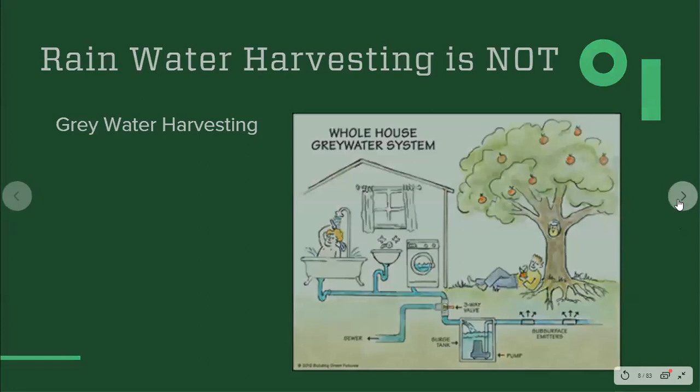So I am not a lawyer at all. I am a horticulture person. So I'm not going to really interpret these laws for you. I have screenshots from the actual law, so you can see the actual language of the law. You can interpret it how you think it means. Any big questions on the law itself, I probably won't be able to really answer for you, but I just want to let you know what the law actually states. So let's go over some of this.

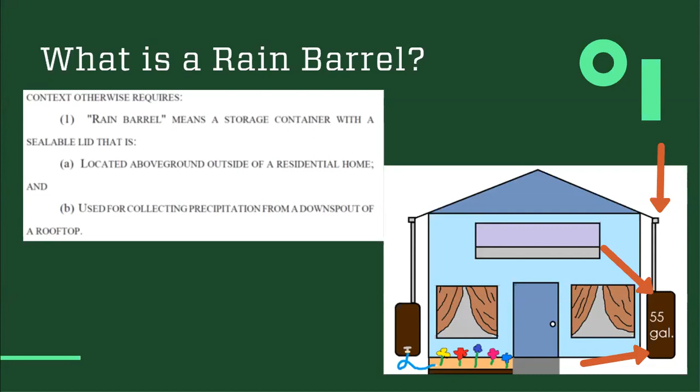So in the law, a rain barrel is defined as a storage container with a sealable lid that is above ground, so they're not supposed to be buried, and outside of a residential home, and we're using it to collect precipitation from a downspout of a rooftop. So pretty specific, but there's also some room for interpretation there as well. The container could be a lot of different types of containers, and then we get into the wormhole of what is a residential home, and we'll talk about that a little bit further here.

So how much water can you collect? You can collect no more than 2 rain barrels with a combined storage capacity of 110 gallons or less. So you can't have 3 rain barrels even if the capacity is still at that 110 gallons. You can only have the 2 vessels, and your maximum amount is 110 gallons. So basically, to get the most rainwater that you legally can, 2 55-gallon barrels is the optimal situation that you're looking for.

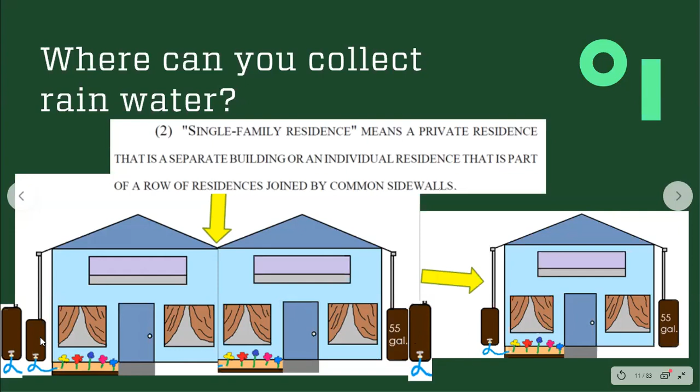So the law does go on to define a single family residence as a private residence that is a separate building. So that's the easy situation, a standalone single family home, or an individual residence that is part of a row of residences joined by common sidewalls. So here's our single family home, easy. And then here, these two residences, they do share a common sidewall. They are separate residences and they would both be able to have their two 55-gallon barrels.

Now, just a little note about HOAs, homeowners associations. The law does specifically state that the homeowners association cannot prohibit you from using rain barrels to collect precipitation. However, they can potentially give you guidelines as far as what the rain barrels need to look like, where you can put them on your property, and things like that. But they can't just tell you no.

So how can we use that collected rainwater legally? Again, this one gets a little bit fuzzy. The collected precipitation must be used for outdoor purposes, including irrigation of lawns and gardens, which is really the main reason that I think people would want to have a rain barrel.

Now, a lot of people ask, can I water my pets with them? Or can I bring my houseplants outside and then I'm using it outdoors? I don't know. There's a lot of ifs in here, and maybe we'll get into who regulates the law, and they would probably be a better person to ask, but it's just not 100% clear about what that means. But irrigating outdoor lawns and gardens, 100%, totally fine to do.

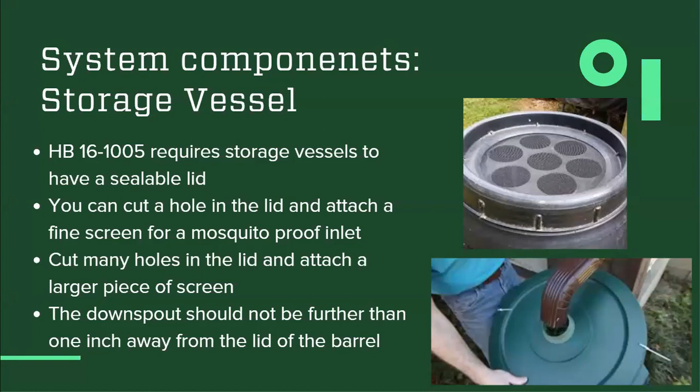And then the downspout should not be further than 1 inch away from the lid of the barrel. So we don't want, you know, like a couple feet in between our downspout and our barrel. There's going to be a lot of waste that way. It's best to get it within 1 inch of the inlet into the barrel. You also, instead of having your inlet go in the top of the barrel, like it shows in this photo, you can have the inlet go in the side of the barrel, near the top. That would be totally fine too.

Excuse me 1 second. My dogs are barking. Hey. The mailman. Sorry about that. Okay. Another joy of working from home.

So you want to have that. If you're looking for a prefabricated barrel, make sure there's an overflow. There's a lot of prefabricated barrels that are not well planned out, let's say. So look for that. You need an inlet for the downspout, obviously. There's got to be a way for the water to get from your roof into the barrel.

And then you want to have at least 1, possibly 2 hose spigots. Ideally, the spigots are going to be 8 to 9 inches from the bottom of the barrel so that you avoid sediment. I mean, it's kind of natural. Sediment's going to get in the barrel. You want to have some room for that to settle, so that when you open the spigot, you're not just draining out a bunch of sand and dirt. So 8 to 9 inches from the bottom should be just fine.

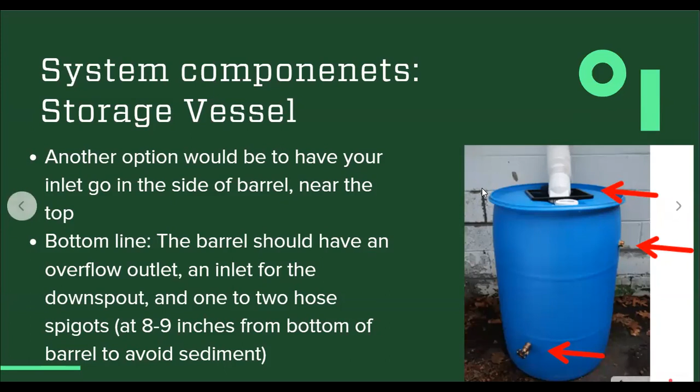So that's kind of the storage vessel. And then how do we get the water from the rain barrel into our landscapes? This is a gravity-fed system. I'm sure that there are those of you on the call who have the skills to be able to create some kind of pump and something really fancy to get the water from the barrel to the landscape. For myself and probably some more of you, this is going to be a gravity-fed system, easy and simple.

Now, I've seen people hook up a drip system to their barrel, but it's not the easiest thing to do. For one, your barrel's probably going to have to be at least 4 feet above the emitters. So you're going to have to raise that barrel up a pretty good amount. And even then, your flow is going to be kind of poor. And if you've ever used a drip system, you know that you need a little bit of pressure to get that water pushed through those emitters. So it can be done. Definitely not the easiest thing to do.

The easiest thing is to just hook a hose up to that spigot, open up the rain barrel, set the hose near the base of the plants that you want to be watered, and kind of move it around every few minutes. That's the easiest way. You can also fill watering cans either with the hose or just straight from the spigot. Those are totally fine ways of using the water from your rain barrel, super easy. The pressure is going to be best, obviously, when the barrel is full and when it's elevated. We do suggest that you elevate the barrel, and we'll get into that a little bit more.

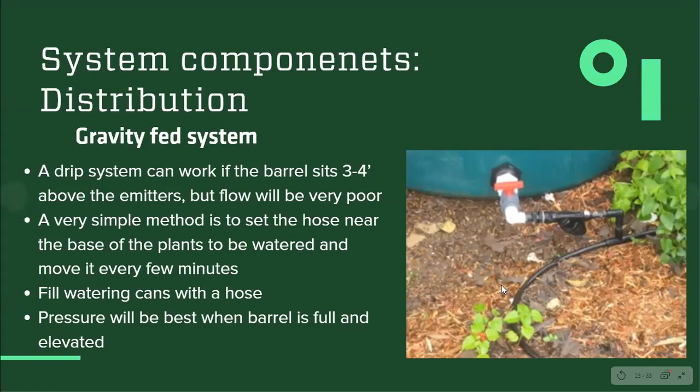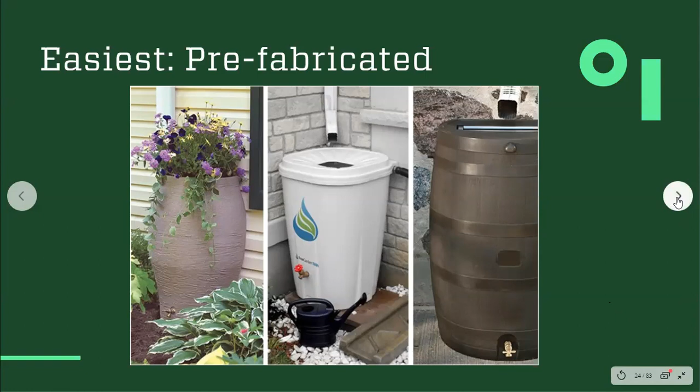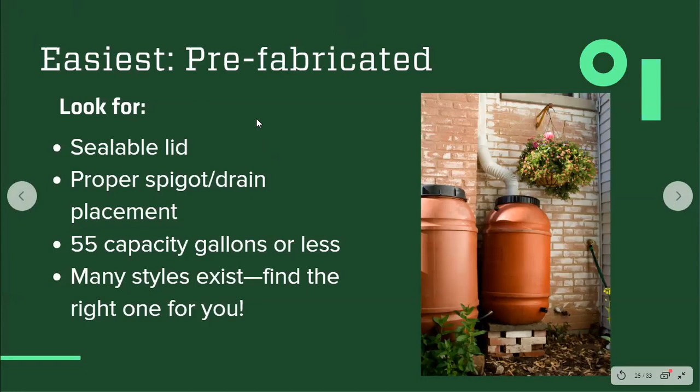So check that out. Ideally, you want it to be a 55-gallon barrel so that you can buy 2 of them and collect your 110 gallons. And there's many styles that exist. So find the style that's right for you.

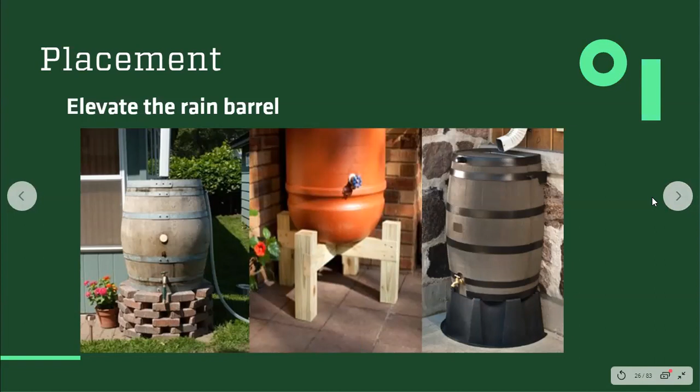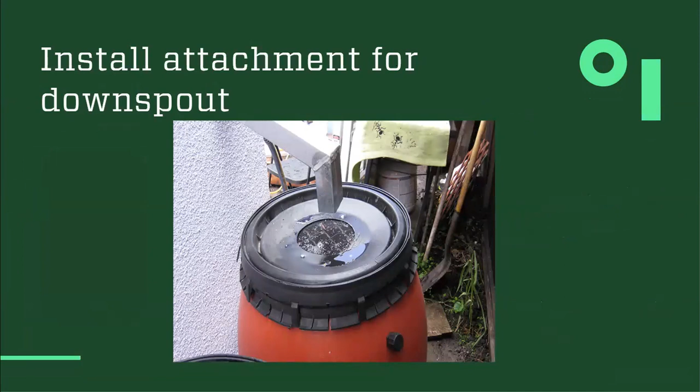Now, we next need to consider how we're going to attach the barrel to the downspout. How are we going to get the water from the downspout into the barrel? So one thing to consider is downspout filtration. I have lots of trees in my neighborhood. We have to clean our gutters out a few times a year. We don't want all of those leaves clogging up our downspout and our devices that are getting water into the barrel. So there's a few different things you can do.

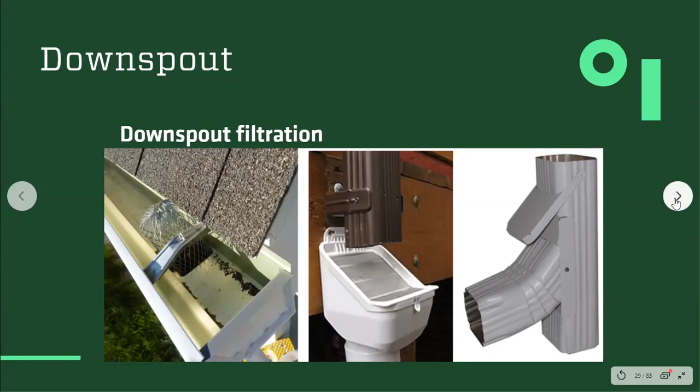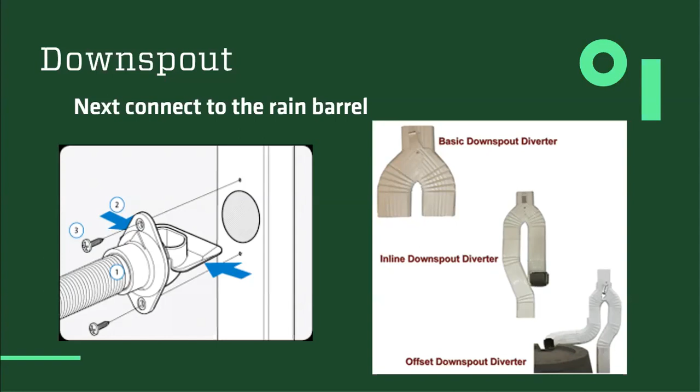All these different kinds of diverters do similar things. It just depends on your site, the design that you have in mind, how you want this to look on your downspout. If you want to drill a hole in your downspout, if you want to cut your downspout, these are all things to consider. And there's just a lot of ways. You can just cut your downspout and have it pouring straight into your rain barrel. But you have to have a good plan for overflow in that case. So lots and lots of ways to do it. These are just a few of the options.

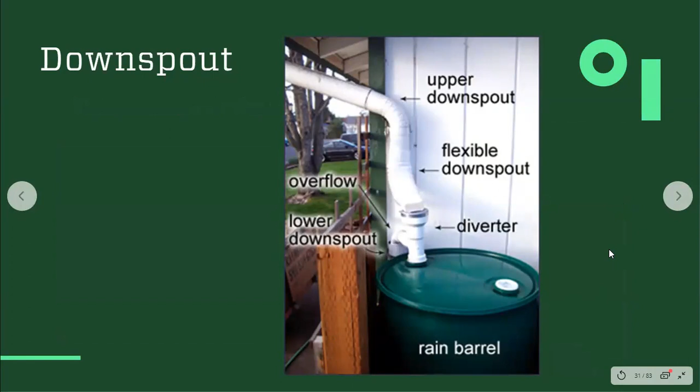And here's another photo of somebody else's setup. So they have their upper downspout here coming from their roof, connected to a flexible downspout that is going into a diverter that will divert the water into the barrel until it fills, and then the water will enter the lower downspout and drain just like it would normally if there were not a rain barrel there.

So the next step is to integrate that barrel into your landscape. You want to figure out, how am I going to use this water? It's no good to harvest it and store it and then not use it. So definitely have a plan for how you're going to integrate that barrel into your landscape and use it beneficially. So one of the first questions to ask yourself, where do you want to use the water? Consider the water demands of different plants. If you have some very xeric plants, maybe you're not going to be using your rainwater on them because they don't need a lot of irrigation. You might want to use it on some of your higher water demand plants.

Aesthetics, maybe your HOA says it can't be in the front, it has to be in the back, or maybe you just don't want it in the front. So think about how it's going to look. Ease of use. You don't want it somewhere where you have to crawl over a bunch of rocks or things like that to get to it. Make it easy to use because you're more likely to use it if it's easy to use.

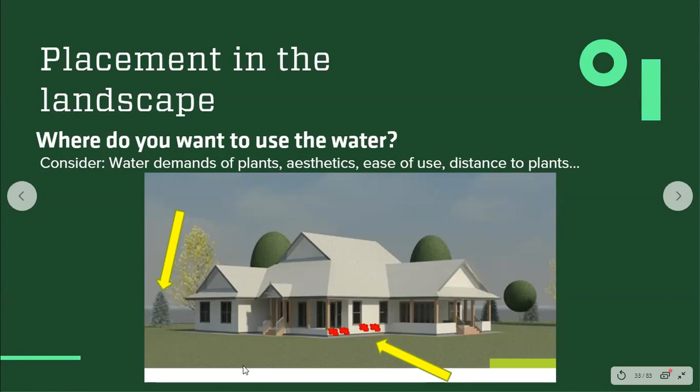And then probably the biggest one, think of the distance to the plants you want to water. So if you want to water this tree over here that this yellow arrow is pointing to, you probably don't want to put your rain barrel way on the other side of the house. Same if you want to water these flowers, you don't want to put the rain barrel really far away from it. So definitely consider the distance to the plants that you hope to water.

And then, do you have access to a downspout? I mean, this is going to be your limiting factor, right? If you really, really want your barrel over here in this corner, but there's no downspout, you could potentially extend your downspout over there, or adding a downspout would definitely be possible, but think about where your downspouts already are. And can you make those spots work for you? That would be easiest.

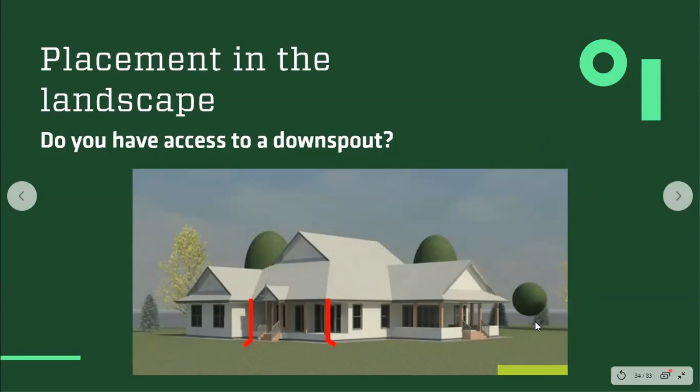And then think about your roof geometry. This is something I did not ever consider until I installed the rain barrel. So take a look at how much of your roof is draining into that specific downspout. Maybe you want to install your barrel where you're getting the most runoff from a roof, or maybe you have way too much runoff from a certain area, so you need to move it to a downspout that gets a little bit less runoff. So take a really good close look at your roof geometry, where your downspouts are located, and how and where they're draining.

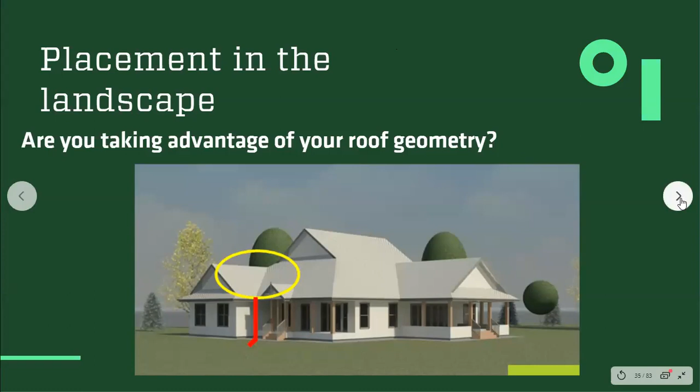So this is a neat thing to figure out. This is an equation that will allow you to figure out, using the amount of rain that fell in inches, how many gallons of water you're going to get into your barrel. Sorry for the folks not in America that we're using American units here. I'm sure another equation exists, and you can find anything on the internet.

So let's look at an example of that. Let's just say that the square footage of our roof that we're looking at here is 500 square feet, just for the sake of this example. And here's our runoff coefficient, is what we'll call it, 0.63. Now you can see we have a few different amounts of inches of rainfall, and then how many gallons that gives you in your barrel.

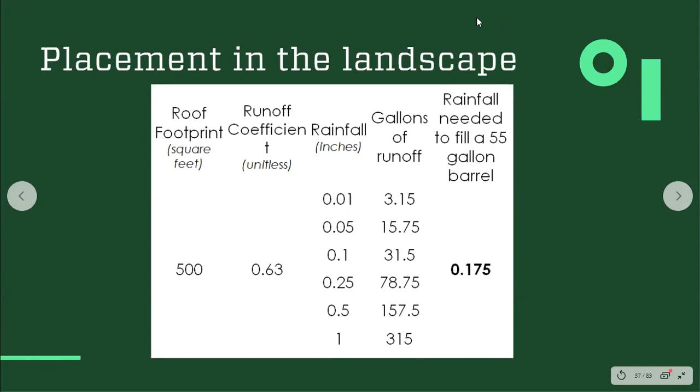If it rains 1 inch, that's 315 gallons. That's way more than we could ever even collect. So they fill fast, faster than you would think if you haven't had a rain barrel. So that is definitely something interesting to take a look at. So how much money and how much water is this going to save you? Let's take a look at that.

So this answer, you know, it depends. It depends on a lot of things. It depends on the hydrology of your roof, like how much is running off from your downspout into your barrel. On your landscaping features, do you have some landscaping features that are making better use of what you are collecting? The water use of the plants is obviously huge, the size of your lot, and then the local water costs.

So we're going to look at April to October, because as you can see, that's kind of our biggest rainfall months that we have. So before we go into our example, let's make some assumptions here. Let's assume that we can capture and use 40% of the monthly precipitation. Some is going to get lost during large thunderstorm events, whether that's overflow out of your gutters or overflow out of the barrel. There's a lot of things that could happen. So let's assume we capture a little less than half, 40% of the monthly precipitation.

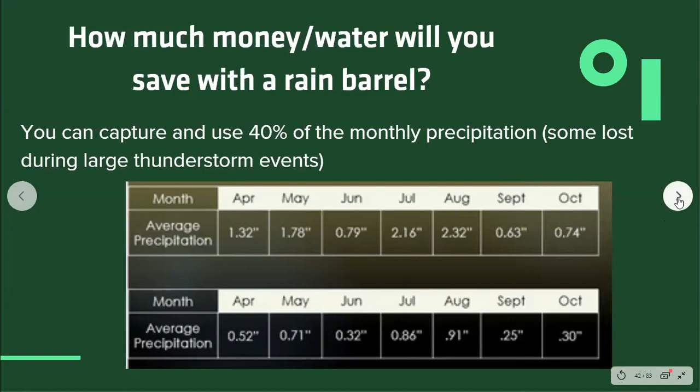All this is showing is we took the average precipitation and we took 40% of it. So here's the inches of rainfall that we are assuming that we are collecting in our barrel April through October. And then we plugged those inches into our equation using the 750 square foot collection area of our roof. And these are the amounts of gallons that we capture for each of these months using that 40%.

It's not about money is basically what I'll say here. It is saving you a little bit of money, and it is absolutely saving a little bit of water. But the reason to have a rain barrel in your yard isn't to save money. If that's why you're here, I'm sorry to disappoint you. But it's not about that really.

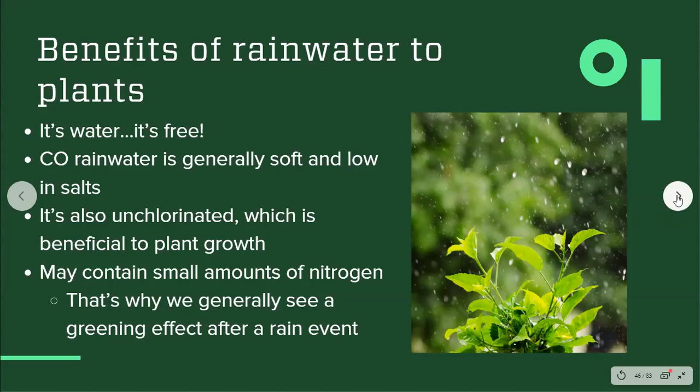So let's talk about safety. Like I said, there's a lot of safety stuff to consider when we're thinking about installing a rain barrel. And so one of the first things to consider is storing, mainly how long you're storing it and how you're storing it. So ideally, you want to use that collected rainwater right away, within a week if possible. That would be the ideal thing to do.

The research has shown that you can store the rainwater for up to a month, but if you hold it longer than a month, you should drain it for a lot of reasons that we'll get into, contaminants and things like that. And also, rain barrels are only relevant if you use them. There's no point to capture this water and store this water and just hoard it. There's no point in that.

So let me give you a little example that shows you how harmful it could be to store the water and not use it. Let's say we have a subdivision, like an HOA kind of thing, and there's 1,000 homes. And every one of those 1,000 homes installs one rain barrel. And let's say 20% of those homeowners don't use their rain barrels. They don't use the water in them. They just let it sit there.

That's 11,000 gallons not entering back into the water cycle. That's a problem, and that defeats the purpose. So use that water that you collected. That's why you collected it.

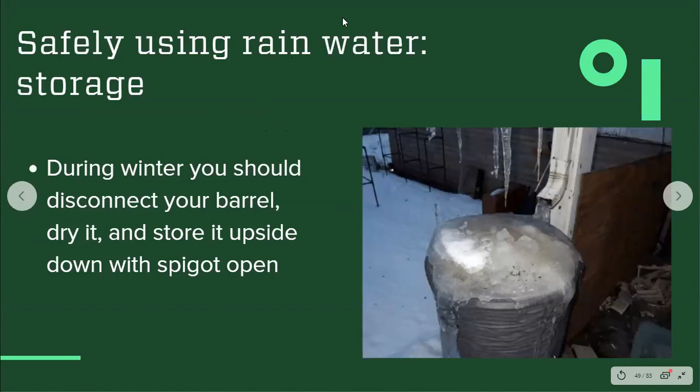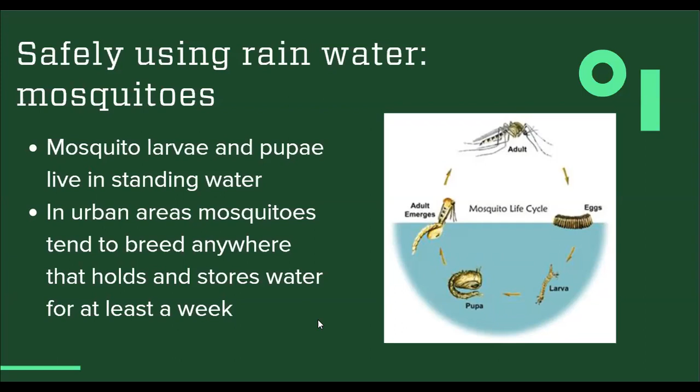So in urban areas, it's been found that mosquitoes will breed anywhere that holds and stores water for at least a week. That's why we're saying ideally use that water within a week so that we don't have the mosquito problem. This is why the House bill requires the rain barrels to have a sealable lid so that the mosquitoes can't get in and breed, and we don't have more of a mosquito issue now that we allow rain barrels.

You've got to cover the inlet from the downspout into the barrel with a fine screen that mosquitoes won't be able to enter, and then at least once per month, empty that barrel completely out. That way, if a mosquito did find her way in and lay her eggs, you're going to get rid of it. And if you plan to be away from home for an extended period of time, just go ahead and disconnect that rain barrel from the downspout. That way, something doesn't happen while you're gone.

So you're going to have an overflow hose like we've talked about. You want it to be at least 8 feet long. This should prevent mosquitoes who are searching for water to breed in from finding your barrel. You also can attach a piece of fine screen to your overflow hose on either end to prevent mosquitoes from getting in.

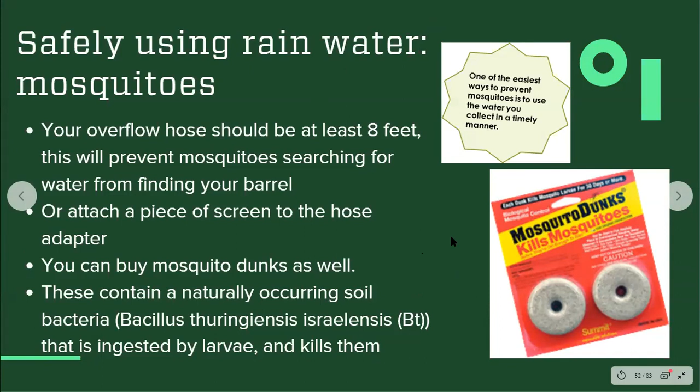There's also mosquito dunks that you can buy. They contain a naturally occurring soil bacteria that's ingested by the larva of the mosquito, and then it kills them. So if you want to be super extra careful, you can get that. If you're going to be irrigating edible gardens or something like that, I would definitely read the label and make sure that that's going to be okay for the product that you get.

Now, water quality. This can also be a bit of a safety concern. Now, relatively speaking, rainwater in Colorado is of pretty good quality. We don't have a lot of issues with our actual rainwater being contaminated, thank goodness. But one of the biggest problems, especially down here in southern Colorado, is that it doesn't rain a lot.

So in between rain events, there's a lot of time for things to build up on the roof, like bird droppings, dust, and other contaminants. And then the water runs from the roof into the downspout and it brings all those contaminants with it. So that's the bigger problem than that the rainwater itself isn't clean. It's that our roofs are typically kind of dirty.

So there's also been tests that have shown that, depending on what your roof is made out of, there could be heavy metals that are getting from your rooftop into the water. So that's something to consider. To be honest, I wouldn't irrigate edible plants with your rainwater. It's just not worth the risk. Use it on your trees and your ornamental shrubs and flowers. It's just a safer bet.

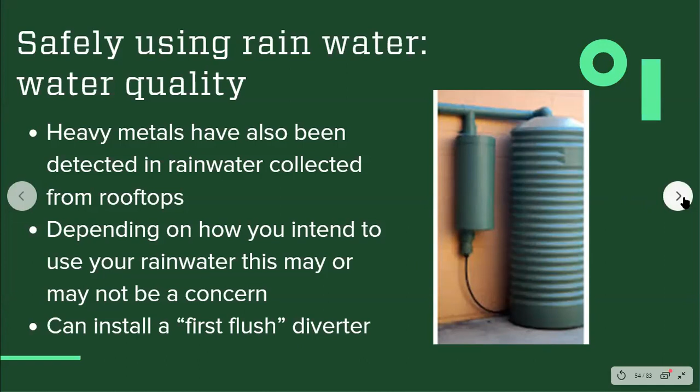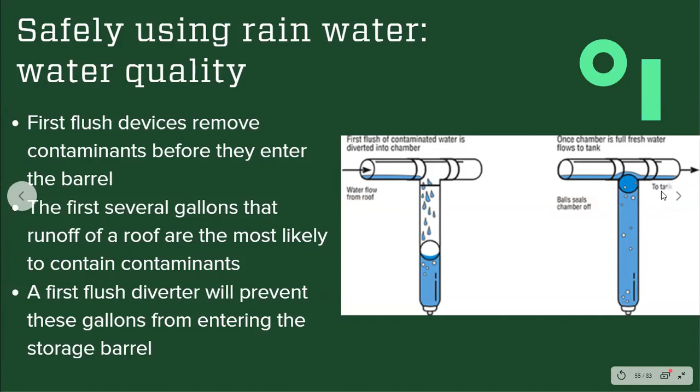Another safety concern could be algae, and this is a big concern, especially if you have a white barrel. A lot of the barrels that you would get for free from different food places are white. So this is definitely something to consider. If you do get an algae breakout in your barrel, you can wash it out with a very, very dilute bleach solution. We're talking like 2%. And then you're going to have to rinse your barrel very, very well after washing.

And then beware of where you're draining that dilute bleach solution. You don't want to drain that onto your lawn or your plants or anywhere where your pets or children might get into it. So do be aware of that. And like I said, just be really cautious of watering edible plants with water from a barrel that has had an algae problem. There are some algae that produce toxins that can be harmful to humans. So again, I don't water edible plants with my rain barrel. It's just a safer bet not to.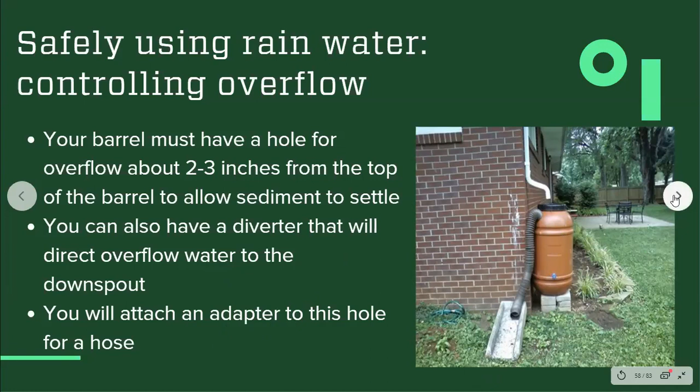So you can use the overflow hose from barrel 1 and connect that to a hole in barrel 2, and then have another hole in barrel 2 that would be for even more overflow. Now, if you wanted to do something like this, barrel 1 does need to be slightly higher than barrel 2 because gravity. So do consider that.

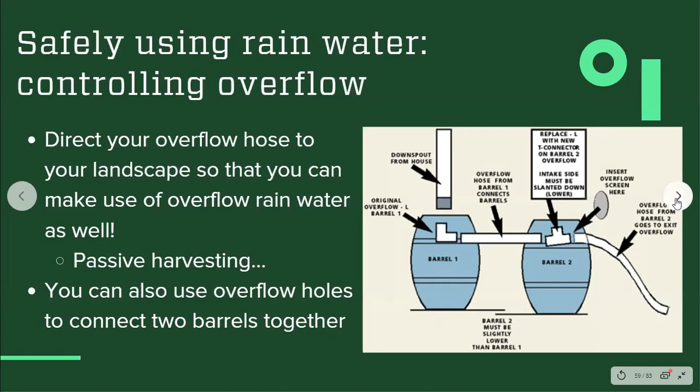So when it comes time to install the barrel, select a downspout. Hopefully you've already been out in your yard and you know which section of your roof it is that you want. You may need to cut the downspout or drill a hole in it. That's pretty likely. You're going to have to do one of those 2 things.

I would definitely use some silicone sealant if you're making your own barrel to seal any spigots or overflow holes. We've done it with and we've done it without, and you want it with, definitely. There's definitely a lot of leakage if you don't use the sealant. So yeah, that's just kind of a list of things that you might need. You might not need some of it, but just some things to consider.

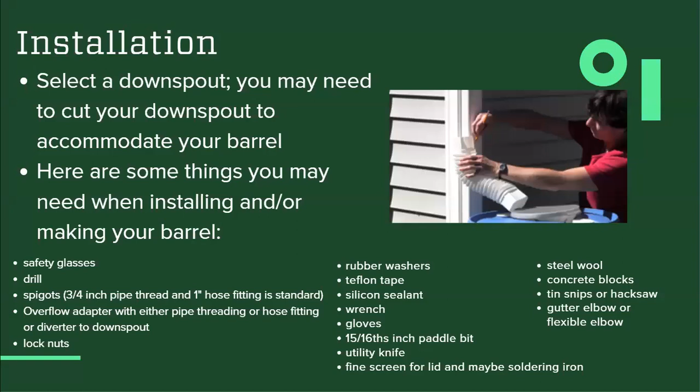So let's look at an example of a little DIY barrel. Actually, I'll take just a quick break and check the chat here and get some questions answered.

So what's a good way to measure or calculate your roof square footage? So once you figure out which sections of your roof are draining to the downspout that you want to use, it's just some geometry, a little math. You probably have to either get up there and measure or just estimate if you're good at that kind of thing. I'm sure not. But get up there and measure and break it into some squares and use the equation for area to find the area and add up all those different sections to get your rough square footage.

Okay, it looks like somebody also suggested using Google Maps. There's a measurement feature. Did not know that. So thank you, Dom. That is very, very interesting. I will have to look into that.

What other questions? I'll take a quick break and give you guys a couple minutes to enter any other questions that you have so far about using a rain barrel into the chat.

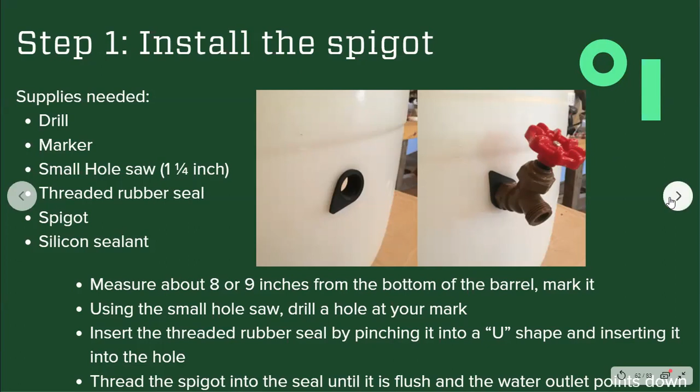So I marked where I wanted my fill hose to be near the top. Consider your site. You don't want to just do this blindly. You want to consider what side of your downspout you want it on. Consider how high it's going to be once you have it elevated. So it's probably best to do this on site where you're actually going to be using it.

And then we attached this little thing that came in the kit called a dam diverter. For that, we just popped the diverter on the end of this corrugated fill hose, and that was that. We also, I guess I could have taken this out for this class, but we had do not drink stickers just to make sure. You never know.

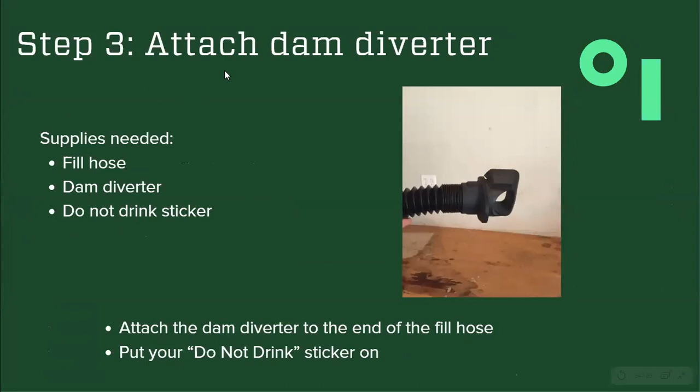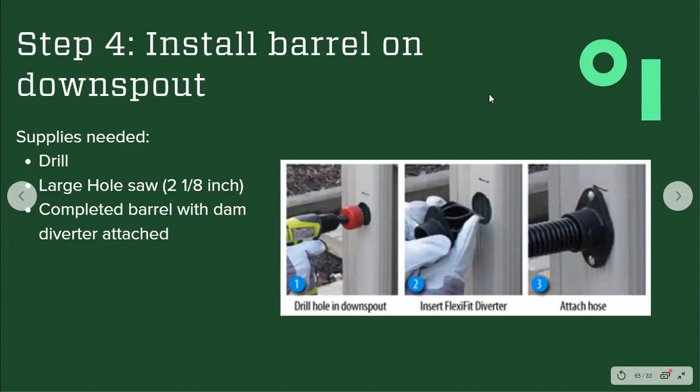So then we get to installing the barrel onto the downspout. So here's a kind of up close picture of how that went. And this is from the kit that I used. So I had another hole saw, a 2 1/8 inch hole saw, and I had my barrel complete with the hose and the dam diverter. I'm gonna go to the other slide where I have the directions, but that's the picture. It'll be on the other slide in a smaller form.

But you want to mark the downspout where you want to install the hose. It's got to be higher than the level of the fill hose because, again, gravity. And then you want to take into account your elevated base. So you definitely want to do this on site with your barrel right there. So using that hole saw, drill a hole at your mark. If you have a downspout with a narrow side, it's best to do it on that end.

Insert the dam diverter with the cup facing up. If you have a diverter like this, you want the cup facing up, and then use self-tapping screws to attach that diverter onto the downspout. Attach the fill hose. If you need to cut your fill hose, if you ever use a corrugated hose like this, you want to do it at a non-corrugated spot, ideally.

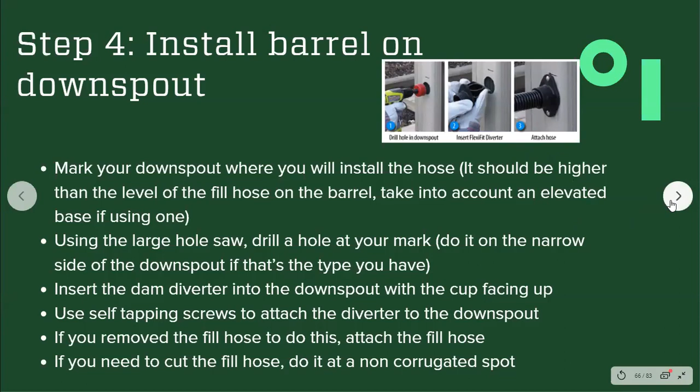So step 5 is kind of optional. You can install a drain at the very bottom if you want to have a way to completely drain it out. You do have the spigot, so not totally necessary, but it is nice to have the drain. So for this, you need a drill, hole saw of the correct diameter. That's going to depend on the size of the drain, so you want to match that up. A threaded drain, we got a brass drain for this. A drain cap so that you can seal it up, an O-ring, and a nut for the inside, and then of course that silicone sealant.

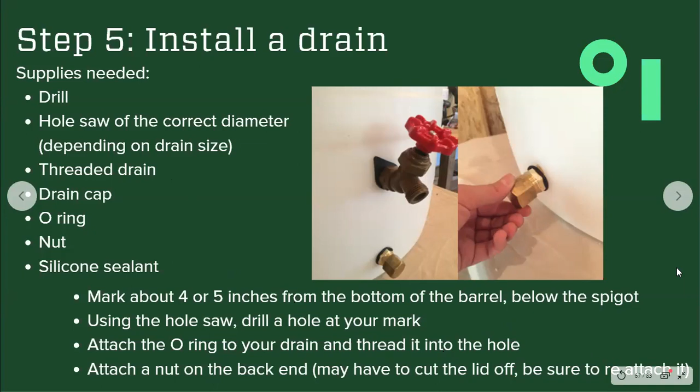So this was about 4 inches from the bottom of the barrel below the spigot. I used the hole saw, drilled the hole, attached the O-ring, using my sealant of course, and then attached the nut on the back end. So unless you have super skinny long arms, you might have to cut the lid off to get the nut on the back of the drain. And that's okay, cut the lid off however you're able to, and then just be sure to reattach it, because obviously the house bill does require a sealable lid.

This step is also kind of optional, to paint it. So we talked about the algae. If you have a barrel that's painted and lets less light in, that's better for preventing algae growth. So you can paint it. If you're not artistic, you can also buy barrel wraps online. That's just something you can slip over your barrel. Alternatively, clean it often and try to place it in the shade if you don't want to do either of those two things. They are optional, but it makes it look kind of cool, and it does help with the algae.

All right, cool. We're going to move into passive rainwater harvesting, which is not using rain barrels. So what final questions do we have about rain barrels? I'll give you guys a couple minutes to get those in the chat. All right, I'm not seeing anything coming in yet, but if something comes up, type it in there. I will see it eventually and get you answered.

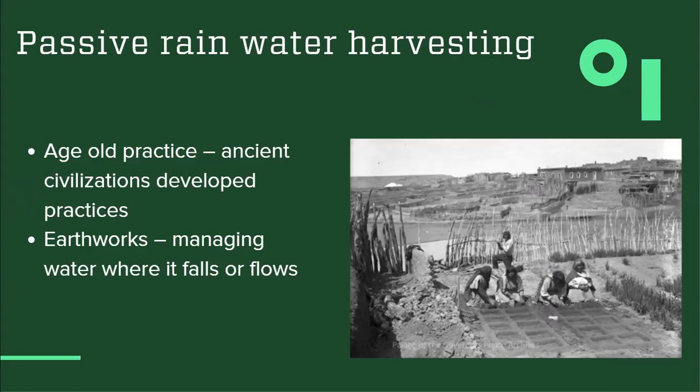So passive rainwater harvesting, a little definition, is diverting water over land to vegetated areas for immediate use. So we're looking at the 3 S's here. We want to slow it down, spread it out, and sink it down. Those are the goals of passive rainwater harvesting. And then you integrate that into your landscape. So these are kind of the main elements of passive rainwater harvesting, the main things to consider.

So gutters and downspouts, that's the easiest thing. You know, you get a downspout extension and you divert it over to your flower bed, or you kind of just are guiding those downspouts so the water goes where you want it to and where it can be used by plants. And then swales, berms, French drains, and bio-infiltration gardens, also known as rain gardens. So we'll talk about each one of those in a little bit more detail.

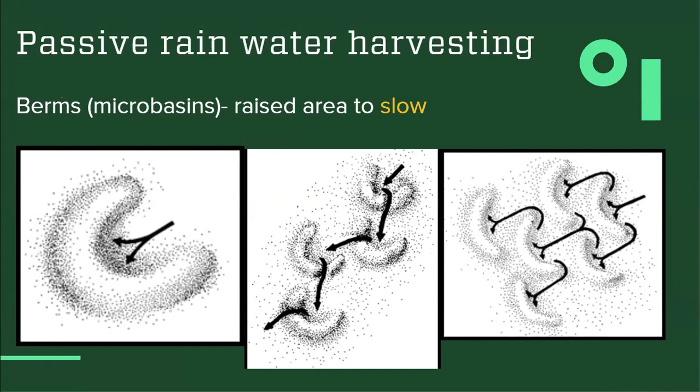Berms, and a lot of times berms and swales, they kind of go together. You need that high end to make the low contour area. So a berm, aka a micro basin, this is a raised area that we can use to slow the water. So there's another one of our S's. These are just some little horseshoe shaped examples, how you can pair them up and make these little berms work so that they can slow the water down and keep it on your property a little bit longer, giving it a chance to sink into the ground.

Now, something to keep in mind about berms, if you're building a berm, you don't want it to just be like this sudden hump in the landscape. You want a very gradual slope. It's better for the slowing of the water, and then B, it just appears as a more natural part of your landscape. So if you're building a berm, that's a more attractive and more useful design.

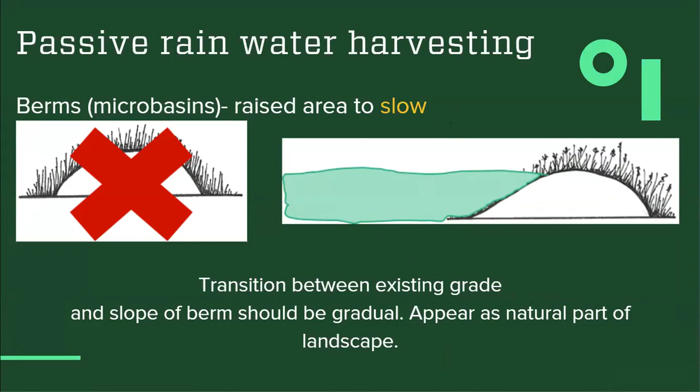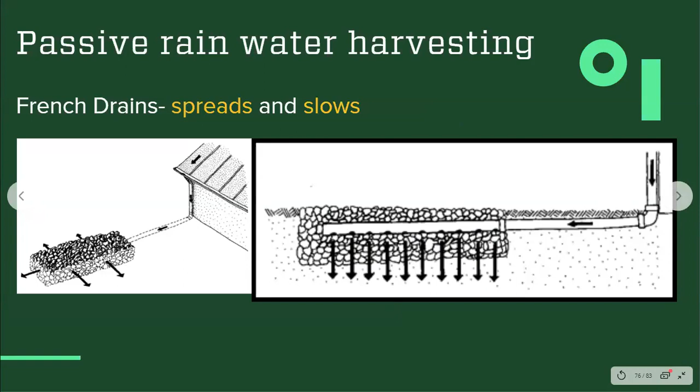So rain gardens use the plants, obviously. They use the natural soil. You might have some natural mulch in there. When you have good plant life, good healthy soil, and you're using mulch, you're naturally going to have soil microbes in the soil. These are all going to work together to slow down this water and to treat the stormwater runoff. So it's actually helping with water quality kinds of things too.

This is modeled after a natural ecosystem. You're keeping the water on site to use in your garden. Using those soils and microbes, you can reduce heavy metals, excess nutrients that could pollute the stormwater system, bacteria and other pollutants, which protects our streams and our lakes. And we're also helping to replenish groundwater supplies. So a rain garden is very, very useful in a lot of ways.

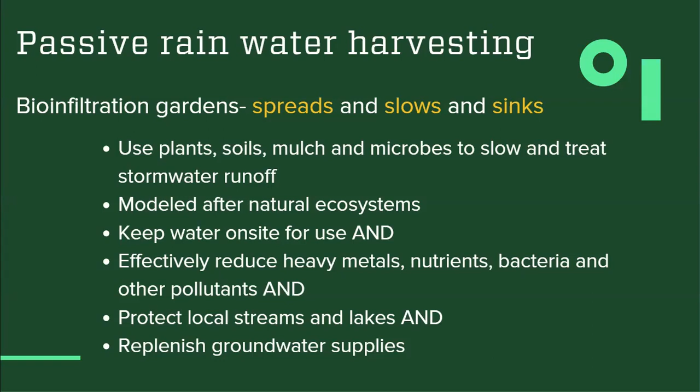So you want to locate your rain garden in an area where the rainwater is already naturally occurring. Plan it like the river flows, the path of least resistance. Where's the water already going? I'm going to install my rain garden here so that the rain will run off into my garden and be used by the plants in my garden. Now, you want to keep your rain garden at least 10 feet away from buildings, 35 feet away from septic tanks, and 50 feet away from water wells, just for safety concerns.

So when you first plant your rain garden, even if you have very xeric plants, native plants, you are probably going to have to give them a little bit of supplemental water until they get established. Once they get established though, if they're water-wise plants, you should be good to go, and they should be able to just wait for it to rain. Like I said, these native plants are adapted to live in those kinds of conditions. So if you see plants that are labeled as water-wise or xeric, those are good plants for your rain garden.

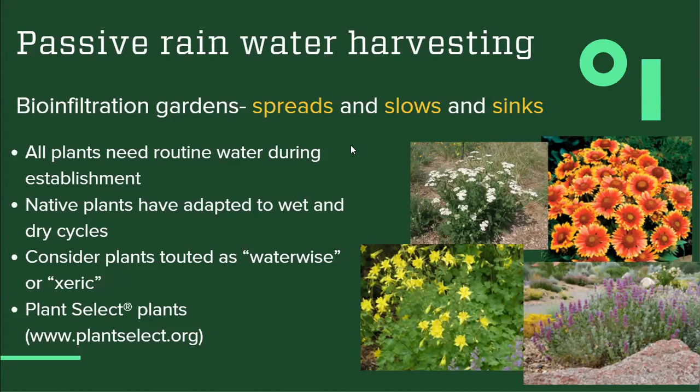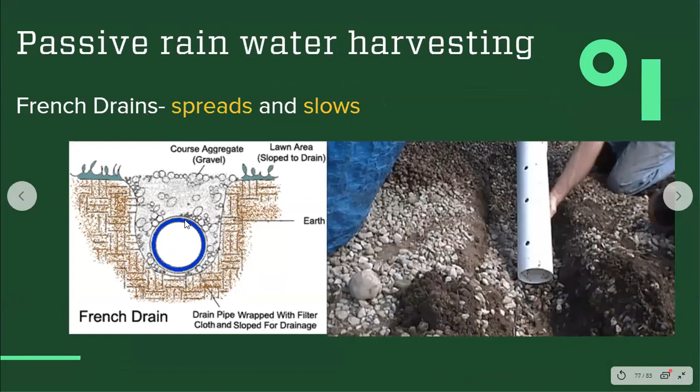Do the French drains get clogged? That's a good question. I haven't personally used them. I would imagine that they could. And if I go back to the photo with the French drain, 1 second, yep, right here, there is a drain pipe wrapped with filter cloth. So I think there is like a filtering cloth that you can get so that those perforated holes won't get clogged, and that would probably be the proper way to do that.

Let's see, if you were starting from our clay, do you have a suggestion for a soil or substrate replacement for a rain garden? Yeah, Dom, if you're using native plants, the soil that we have here probably isn't going to be a big issue, because they're adapted to that type of soil. We have very heavy, very alkaline soil here. So if you're using plants from this area, that's not going to be a big problem.

But I would suggest to get a soil test if possible, so you can see what's going on in your soil, because it's just hard to know otherwise. But it couldn't hurt to just add some organic matter in the form of compost and mix that in if you're making a new garden area, just to bump up that organic matter a little bit.

From John Powell. Hi, John. Where to find a list of plants to use in rain gardens in Pueblo and Colorado Springs? You can find some really good plant lists on plantselect.org. And if you go to the CSU Extension website, there's a plant list that is perennials for Colorado gardens; check out the ones that are marked as low to moderate water usage. And there's also a couple of water-wise or xeriscaping plant lists. Any of those plants would do very, very well.